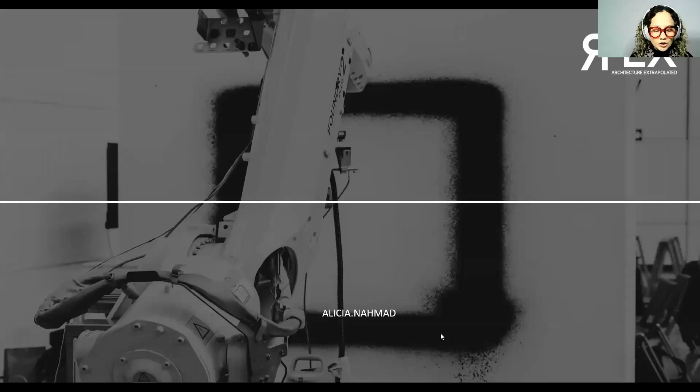My name is Alicia Nahmad. I am the founder of Architecture Extrapolated, and we have been working for the last 12 years at the intersection between digital design and construction.

Today, what I would like to talk with you about is digital construction and about how we are moving slowly towards a human-machine partnership.

What I want to explain is to take you a little bit through the journey of Architecture Extrapolated, RX, and to explain how my career has led me to believe that human augmentation through intelligent fabrication can change the design landscape in a significant way, more than any of those two would do alone. And which I feel is the current situation.

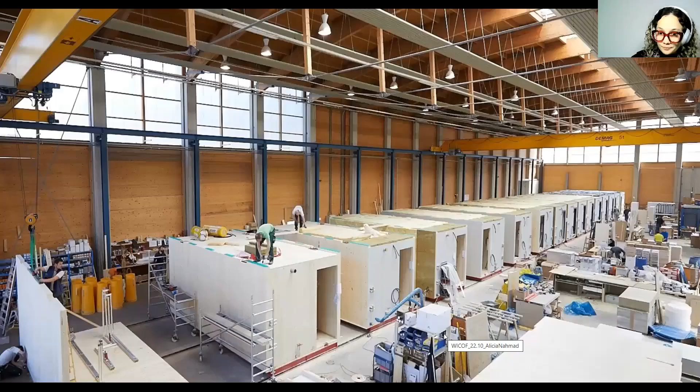So how can we understand what is happening? How can we use new technologies like simulation, robotic fabrication, and materials in a smart way that can allow for a future where the construction industry is moving towards mass customization, more efficient use of resources, less waste, and more importantly, less pollution. And we can see that big companies control 50% of the construction market,

but they are only 1% of the construction industry in terms of people. So that means that there is 99% of the construction industry who makes up the other 50%. No one is addressing that.

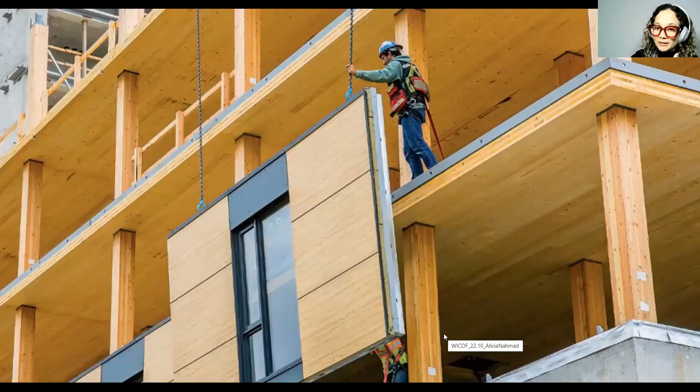that is not currently available to the on-site construction industry. Off-site construction workers don't have people with the knowledge and expertise. They need to recruit people from the manufacturing industry and then train them into some basic construction ideas, but they are mainly coming from knowing how to work with machines. There's not a middle ground between these two areas.

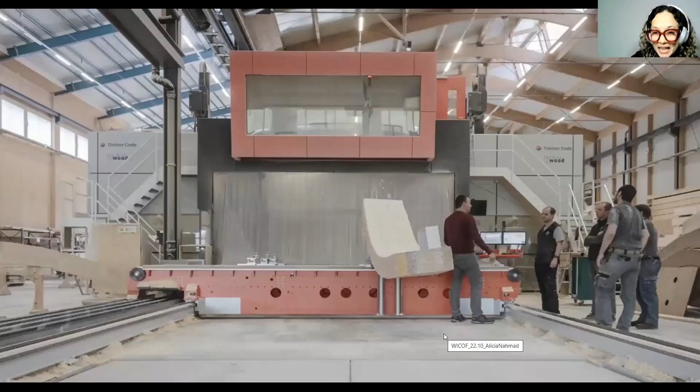Additionally, SMEs represent 99% of all the construction industry, turnover of more than 63%, with a total annual business of 290 billion pounds. And what we see is that they cannot be part of the digital economy because all of these machines are very expensive. They have a very high entry cost, and they need very specialized facilities which a normal SME contractor might not be able to provide.

So that means that as designers, we move towards digital manufacturing and towards digital industrialization of our sector. These technologies are leaving a big part of the industry behind.

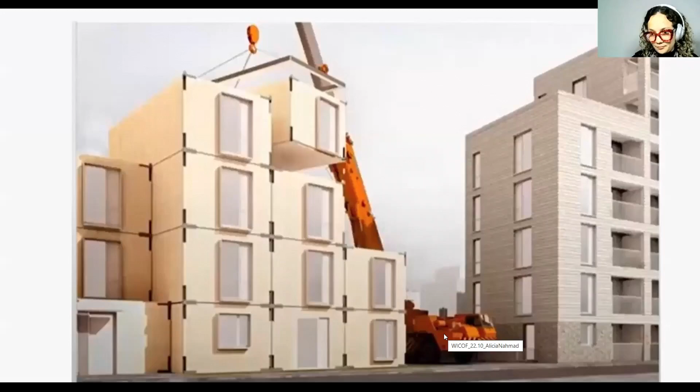Another study looked at when we actually transport these big houses and big volumetric constructions, we have to design for the transportation unit. The design is based on the size of the lorry that carries them. Additionally, this design has to be able to stand forces of braking, acceleration, and all kinds of design forces that are not normally linked to a building, which is not actually meant to be moving around on the road.

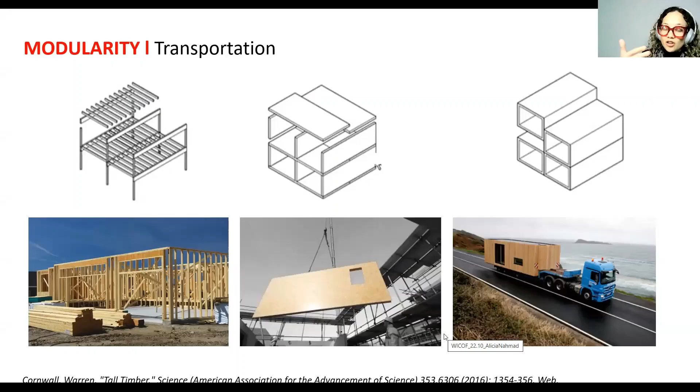What does this mean? That actually there is redundancy in the construction process. The prefabricated units that we cherish and love more every day actually create a redundancy of materials and are not exactly efficient in resource utilization.

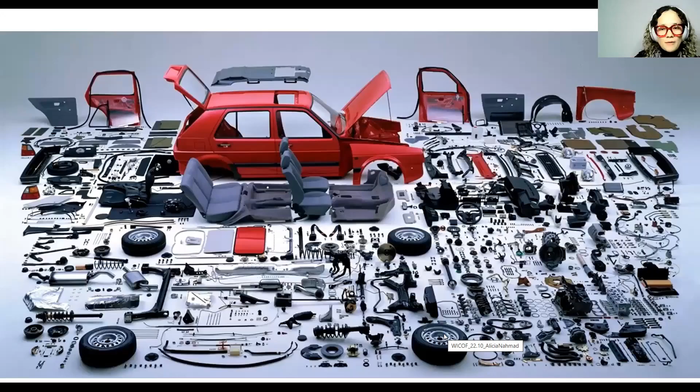We know that we are kind of thinking that houses are a kit of parts, like if they were cars, where we just prefabricate all of these, assemble them, and put them together and prepackage them into your house. Now houses become cars, city becomes machine. It's a kit of parts that gets constantly repeated as a solution to all the problems.

We need to address construction sites that might already be working. We need to retrofit. We need to be in places that might have difficult access, that might be remote. The McKinsey Institute recognizes that 87.5% of the construction market cannot be efficiently addressed with modular and grid-based construction.

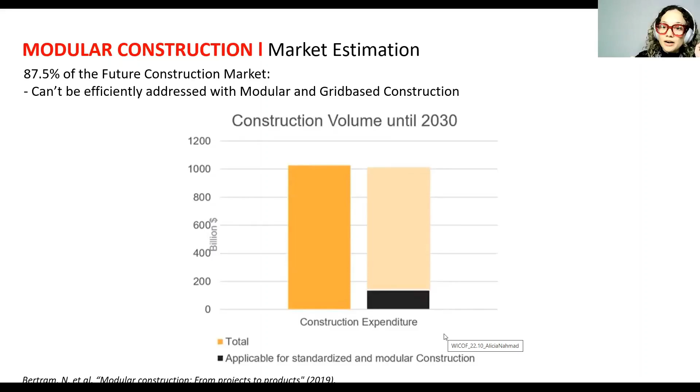And what are we doing about it? How can we merge the capabilities of the machines that are now off-site with the capabilities of the humans that are on-site? And try to create more expressiveness, efficiency, a more efficient and sustainable solution, and also try to create a built environment that minimizes resource utilization by questioning why all the volumetric constructions are boxes.

Is there an inherent problem in the geometry? Can we make that more efficient? Or is the only problem we face how to make better boxes? So that's how Architecture Extrapolated started to exist, to look at geometric solutions that could be built on site and cannot have a higher cost than a normal concrete solution. That's how we started to build this first shell, learning from Candela in 2011.

Now, why do we look for a shell? Because we know that shells are the perfect mix of structure and form. The form represents the structure, the form is the structure, there's no redundancy.

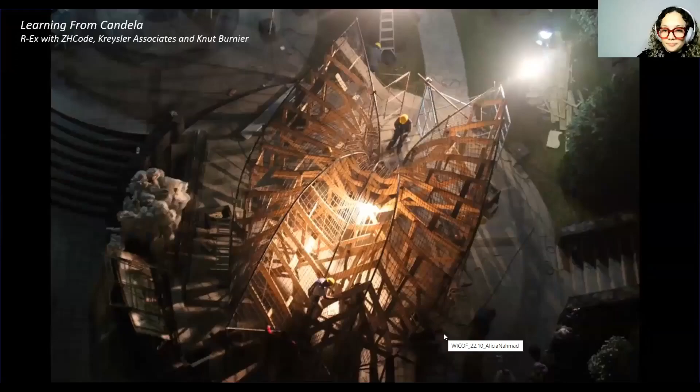This shell was designed using form finding software, but was built fully on site using traditional skills and traditional workers. We used machines like a simple router that could be available anywhere to cut the formwork. One of the biggest problems in building shells is that the form has to be built twice, in the formwork and in the final product, duplicating the material, giving very large construction times and making them very expensive, not only economically but also materially.

In this case, we managed to create a waffle solution that was tailored, very smart, and could describe the full shape on site. This with less than 20 MDF boards. This shell was built from start to finish in 10 days.

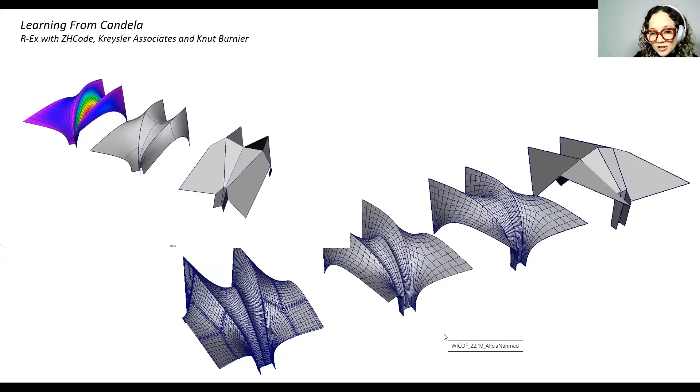Now, by using software technologies that architects are using now for form finding methodologies, we could find a shell that was very efficient in its shape, but we could also customize the edges, knowing that we're not dealing with double curvature. Everything could be curved on site using traditional machines.

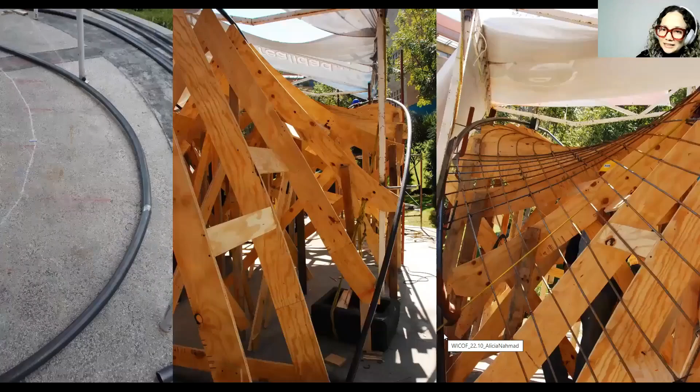Then we had to describe the shape to the builders. Of course, we had to let go a little bit of our high technology in this stage because some parts are difficult to translate, but everything could be put together on site. So the workers became very much part of the process.

We were like, what machine do they have? They don't have a bending machine for tube. Okay, they were going to do it by feet. They don't have a way to describe the shape in space. Okay, we're going to give them points so that they can describe it based on the height.

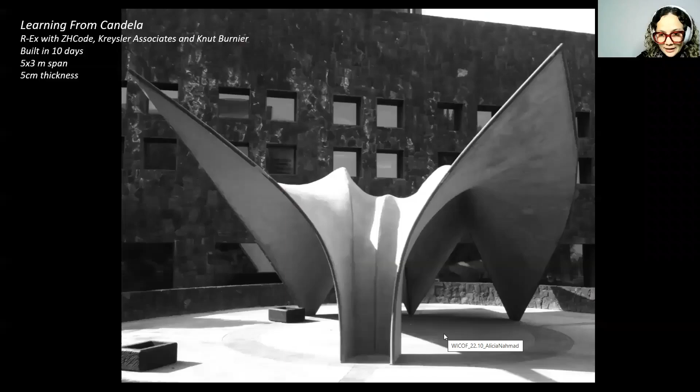And so we were working with them and trying to make them also become excited and learn how they can produce these techniques on site without having to resort to prefabrication.

After we finished this shell, it really shows that the existing local craft combined with digital tools has great potential. What is more, the workers were very excited. A lot of them would come to me and say, we're always just building regular slabs. This actually was very exciting. We built something that we don't do every other day. We want to learn more about this.

They were working overnight. All of it was paid hours, but they were really excited, and we could feel how we really became like a team.

And it really shows that using digital tools from the beginning of the design process can make building shells or non-conventional geometries as efficient and as effective as building a regular structure, with the advantage that in this case, form and structure are the same.

There is less material used. The whole shell has a very small thickness. It's about 5 centimeters, which can be considered very low considering the large span.

This has been standing in Mexico City for almost 8 years now, has survived 3 earthquakes, and it hasn't shown any cracks. So we could really start to be confident that there is a lot of potential in merging digital technologies from the very early stages of the construction process and bringing this on site.

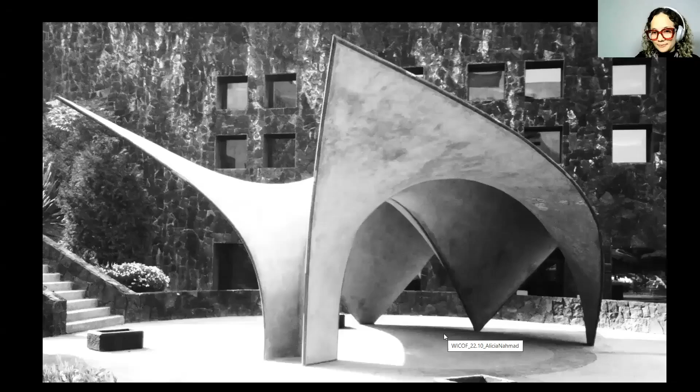Based on that, we started to have a lot more confidence and tried to push a bit further. So then we started looking into additional digital design technologies.

We came to topology optimization. Topology optimization has been used for a few years now, and it's especially attractive to engineers because it means you are reducing concrete usage by up to 60% by removing it from the parts where there is no force flowing to the structure.

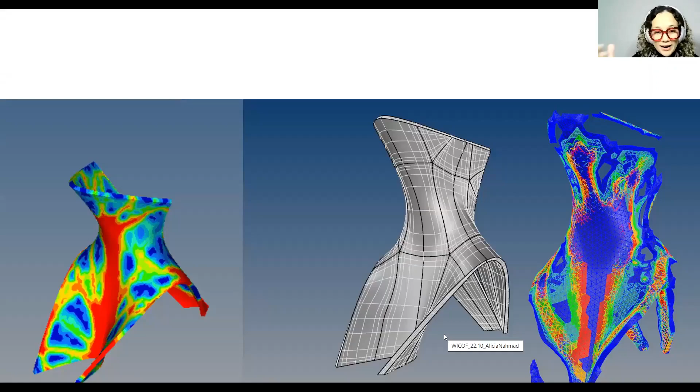So we have the shell, we run a topology optimization algorithm, and we realize that most of the shell is not really working. Those areas are holes, we can just get rid of that material. We end up with 60% less concrete. Considering the pollution rate of concrete, this is great.

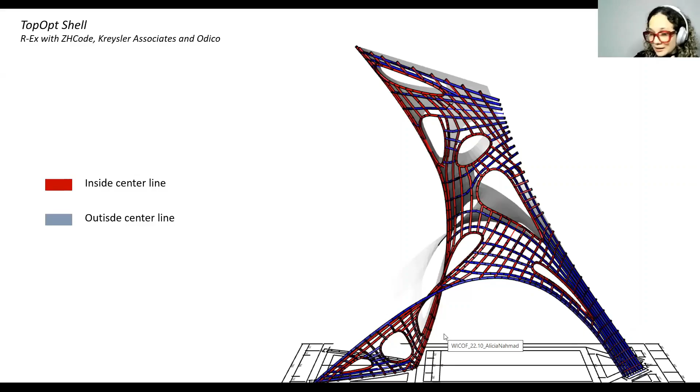Now, of course, this started to require a lot of adaptations. How will the reinforcement bar be laid out if there is no longer span and a shorter span? So we worked very closely with our engineers, like Matsumoto Saki. One of our collaborators worked with Matsumoto Saki at the time, and was really informed on how we could describe the rebar. In this case, we could produce huge savings on material and also an expressive shape that is very characteristic of current architecture and much customized for the site.

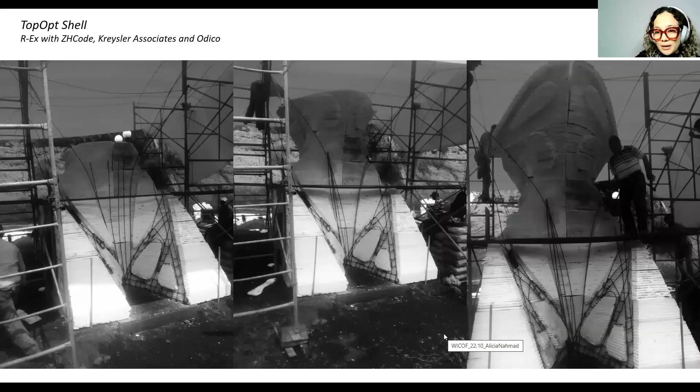Now, in this case, how can we do the formwork? The only reason we need the formwork is because these complex 3D shapes cannot be understood by humans the same way they can just mark a rectangle on the floor. So we had to go to our old friend, the CNC machine, CNC these contours, and be able to produce the shape on site, describing how the rebars were distributed, and they were able to construct it again in 10 days, 2 weeks.

This shell is very different from the first one, because on the first one the distribution of the rebars was normal, like a rule of thumb - thicker ones for longer spans, shorter spans otherwise. In this case there wasn't a shorter span and a longer span, it was all mixed. It was very complex, but the shell was still built in 2013 and it's still standing there. So we realized the construction crew was getting more excited every time about working with us, so we said, okay, maybe we can bring robotic fabrication also on site.

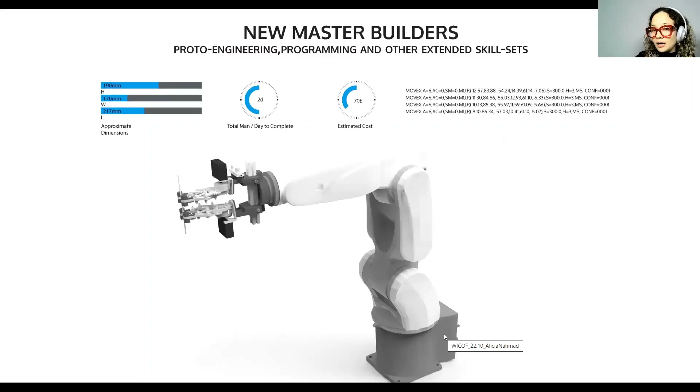Now, robotic fabrication, with the idea of being at the intersection between these 3D geometries that exist on the screen, in the digital world. A robot can understand the digital world because it's basically plugged into a computer. A robot is basically a computer that can understand the digital world, and humans cannot really understand this digitality and this digital space. So based on that, we started to look at different aspects of how we can actually also start to look at new materials.

In this case, we're looking at: can we rethink the brick? Does the brick need to be a rectangle as it was conceived more than 500 years ago? Is this actually something that still makes sense? Or could we have a brick that can allow us to create new geometries and a new vocabulary that is more ad hoc, more according to the new technology that we have?

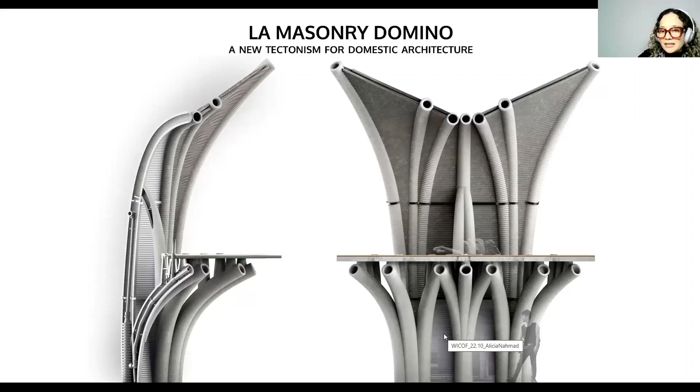But in this case, we were thinking, okay, how can our clothes, our phones, every other technology that we have has advanced, whereas the way we live and the materials we use to build have remained the same? So we started to look at different construction techniques and different materials - the brick, also looking at 3D printing. How can we use 3D printing to embed a lot of this into our facade panels, into the way we work and the way we build, and rethinking the house and the frame and the spaces, and how the frame, through new design technologies, can actually start to become part of the inhabitable spaces.

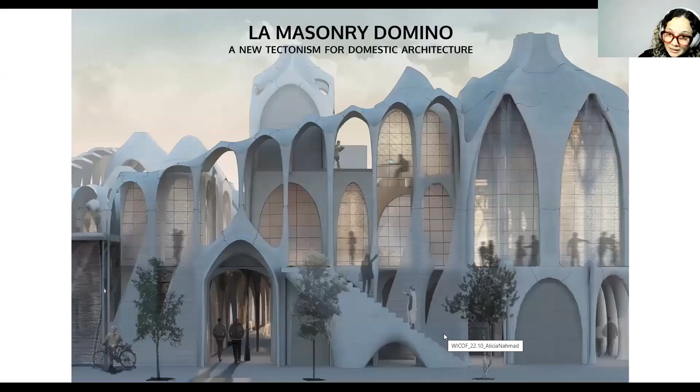Why do we still live on lots, on open plan spaces that were pioneered pretty much in the 1920s? Why can we not start to move to a domestic architecture that reflects its actual production method? And its production method is not the same as it used to be before - it can include robotics, it can include new techniques. So this is a lot of the work we have been doing at the Architectural Association, really trying to rethink domestic architecture.

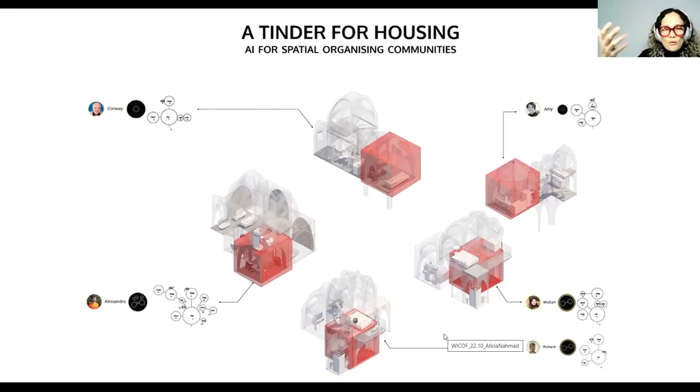What is, how can we start to organize, create an AI for the spatial organisation of communities - a Tinder for housing, as we like to call it - where people can decide who they want to live with, what their preferences are, and what spaces of their house they need. We start to question why every single house still needs to have the same amenities, like a bathroom, a toilet, a kitchen, a bedroom, a living room. Do we need all of these, or can we just select what we need? Can we just decide how organization and spaces can change? Why can we not do that?

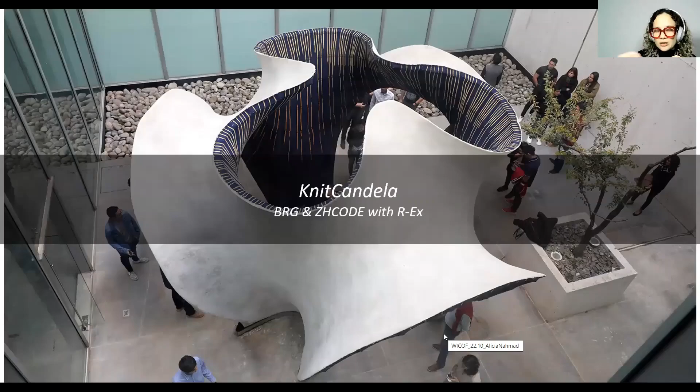This kind of research, thinking how can we rethink materials and how can we rethink the way we live and the way we build, brought us to a collaboration that we started two years ago with the Block Research Group at ETH Zurich and ZHCODE. We wanted to propose a new technology that could embed a lot of this knowledge, trying to work with them.

So they had developed a knitted formwork, which was never really used before for concrete. In this case, the shell was going to be described by a cable net embedded into the knit, and the knit was going to then stay in place.

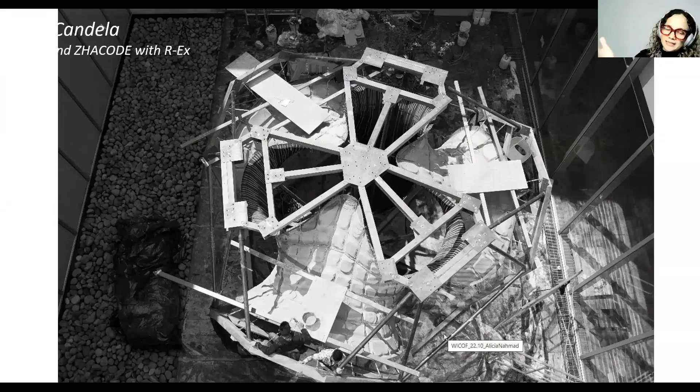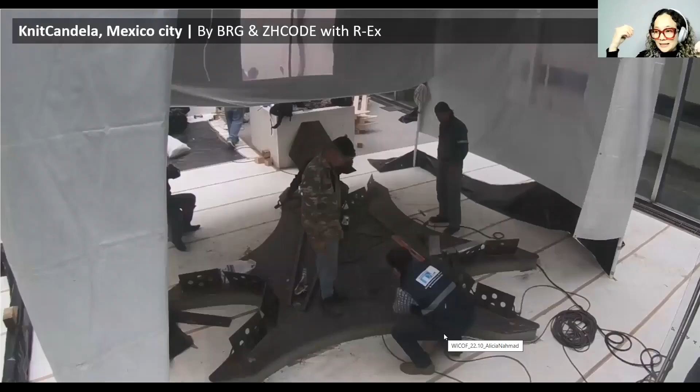We brought together the same crew again, trying to find new techniques and new ways of building. We told them, okay, in this case it's a museum, we cannot have any foundations. Everything has to be self-supported, everything has to be self-contained. So we started to design everything with the idea that there won't be anything touching the ground.

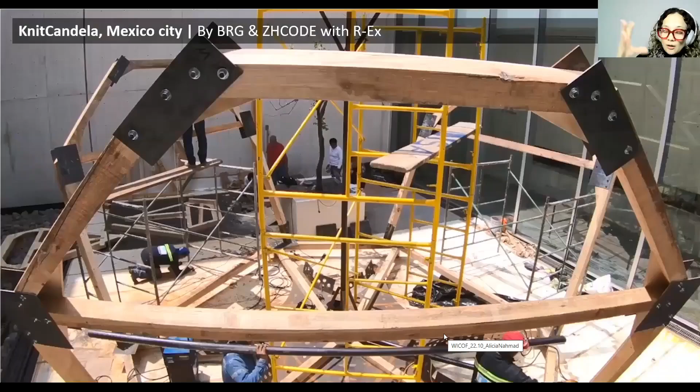It's all temporary, and the full shape is going to be described on fabric. We don't need to create any of the formwork that we had to create before for the topology of the shell. In this case, it will just be brought, expanded, and then you have your shape.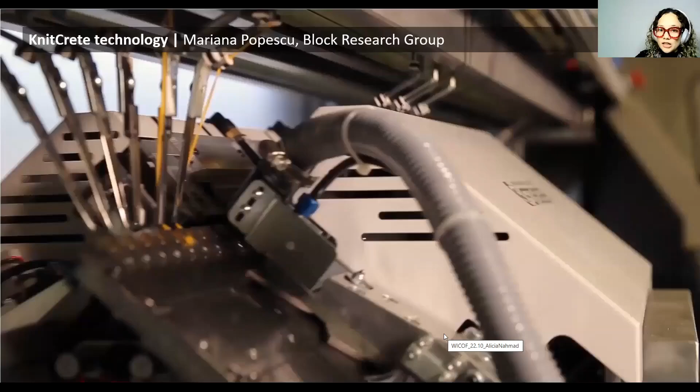We worked very hard on the hierarchy of components, on what needs to be digital and what can be human made, because it's not that everything needs to be digital or robotically fabricated. There has to be a hierarchy where we understand there are fantastic skilled workers excited to interact with digital technologies. What can they bring to the table? What part of their skill can we keep and enhance through digital technologies, rather than just bringing everything offsite to them?

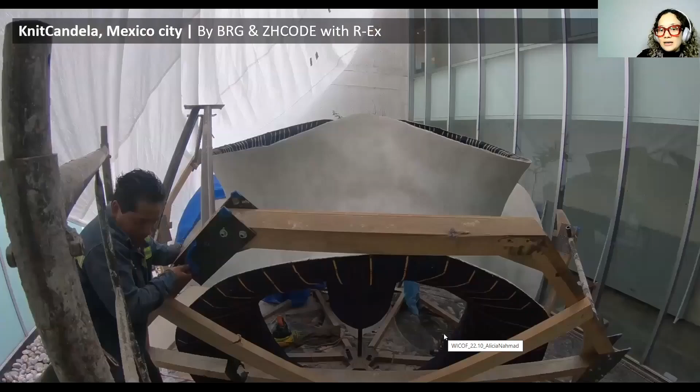Now this gave us the frame onto which concrete was hand rendered on top of the shell. After the concrete was hand rendered, we could remove all the scaffolding used to hold it on site, and we had a beautiful concrete shell that was never touching the ground, and was never described by any other means than its own fabric formwork, which then remained on site as part of the expressiveness of the interior face of the shell.

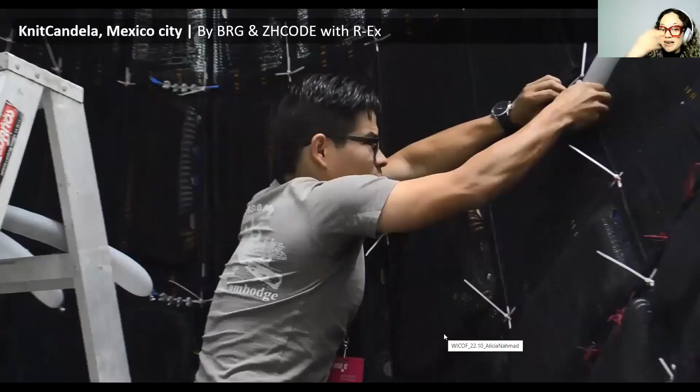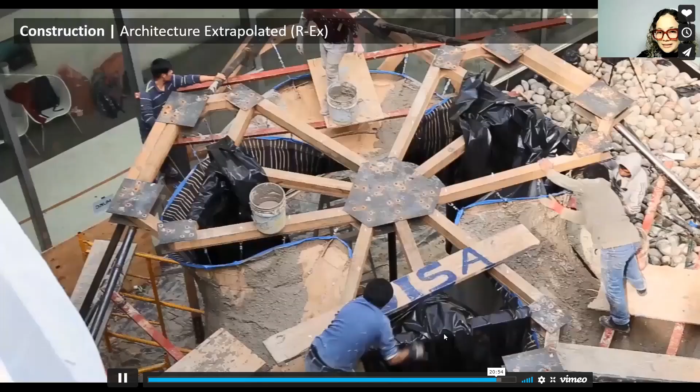In this case, we were also using double curvature, so there were aspects where the concrete might not normally adhere or go. We had to work with that. We worked with inserting modeling balloons to create a cassette kind of structure, optimizing even more the use of material and reducing the concrete weight and use across the whole structure. It was all hand rendered by very skilled workers.

The main takeaway from this was thinking about how we can start to really mix these two worlds together. We have all these ideas of new materials, new technologies, robotics, and we also have skilled workers and skilled labor. How can we bring them together to create more efficient, more expressive, and more sustainable construction? That is where our interest lies.

By bringing all of these new technologies on site, we can also start to attract new talent, because now we have younger people getting excited to participate in this economy. Additionally, SMEs can also become participants of this economy because we are bringing technologies on site, rather than relying only on big players. That's our research, that's our work, and that's where we see the future of sustainable construction.